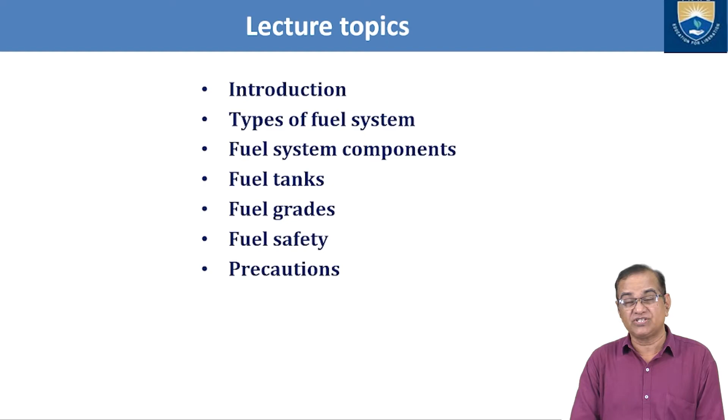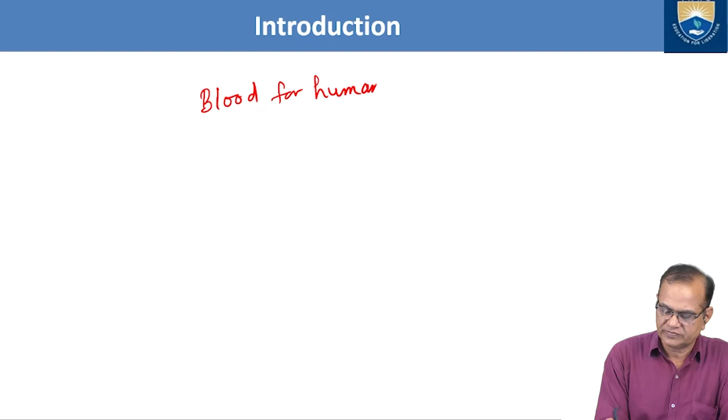So if I talk about the introduction, fuel is like blood. Like blood for human, fuel is for engine. The power is given by the fuel only. If fuel is burned, then only you are going to get the power.

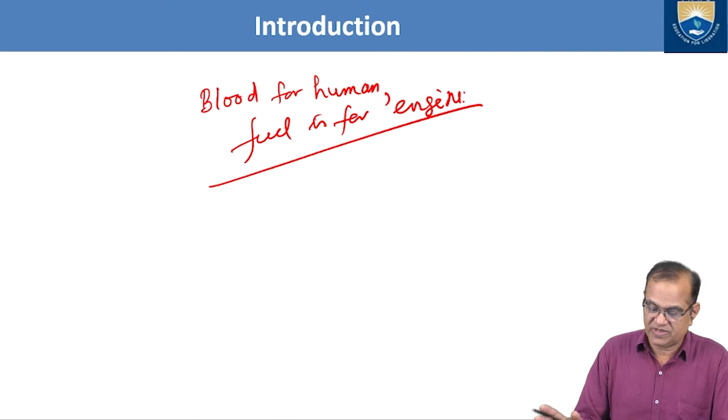These few topics I have already covered in the previous class about different fuel systems, their design criteria, their different types of pumps, their advantages and disadvantages, and so on. Now I will go with the introduction of the fuel system.

The fuel system is one of the most important systems in an aircraft, and its purpose is to store, manage and supply fuel to the aircraft engine. The aircraft fuel system supplies a proper amount of clean fuel at all operating conditions to the engine. The fuel system must be designed such that it supplies a proper amount of fuel to the engine at various phases of flight, such as changes in altitude, rapid maneuvering, sudden acceleration or deceleration.

The fuel system means a complete package of equipment which helps from storage of fuel up to the delivery to the tank in a proper way. That is fuel tank, fuel pipelines, valves, fuel indicators, fuel pressure pumps, warnings, signals, etc.

A fuel system should always be free from the tendency of vapor lock. Vapor lock means the air should not be trapped inside, or the vapor which is generated above the tank should not be locked. That is the tendency.

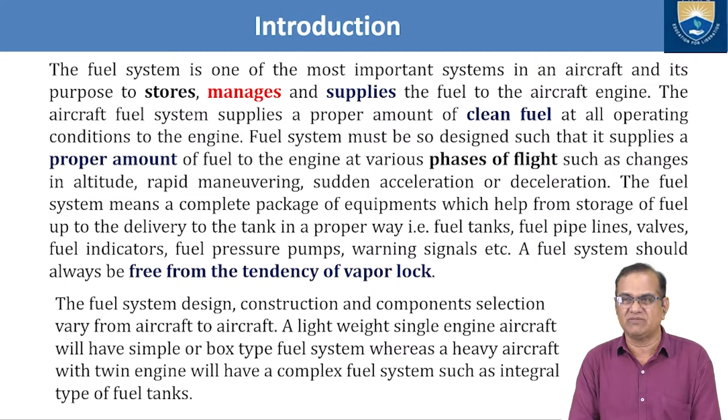The fuel system design, construction and component selection vary from aircraft to aircraft. A lightweight single engine aircraft will have a simple or box type fuel system, whereas a heavy aircraft with twin engines will have a complex fuel system such as integral type fuel tanks.

So here I will talk about the types of fuel systems. Generally, fuel systems are classified into two broad categories on the basis of method to supply fuel to the engine. In a small and light aircraft, generally a gravity feed fuel system is used, while a large turbine engine aircraft uses pressure feed fuel systems.

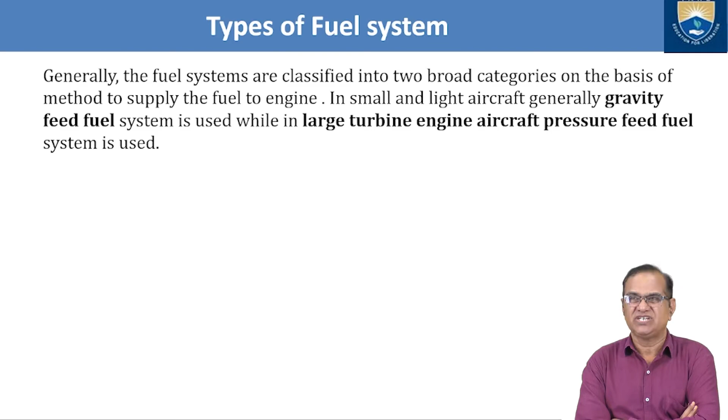So basically we have two types of fuel system: one is the gravity feed fuel system, another is the pressure feed fuel system. For large turbine engines, we use pressure feed, and for small piston engines, we use gravity feed fuel systems.

First, I will talk about the gravity fuel system. This system makes use of the force of gravity to deliver fuel to the power plant from storage tanks. It is most commonly used in high-wing light aircraft, in which the engine is located below the main wing.

As a result, the fuel tank is above the engine, as the fuel tanks are generally located on the main wing. This is the simplest and cheapest mode of fuel feed system, as no additional complex components are used, and it uses only the gravity force.

The main disadvantage of this system is that it is affected by vapor lock, which stops the fuel. This is the big problem and big challenge with this type of system.

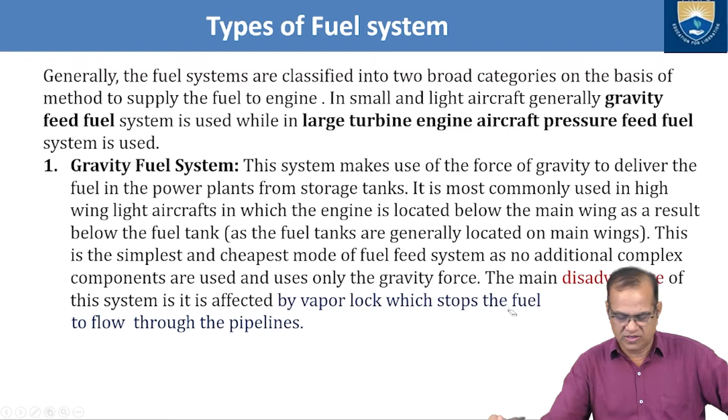Both tanks are connected with a fuel selector valve. As shown in the previous class, the fuel selector valve will select both tanks, select one tank (left or right), or shut off.

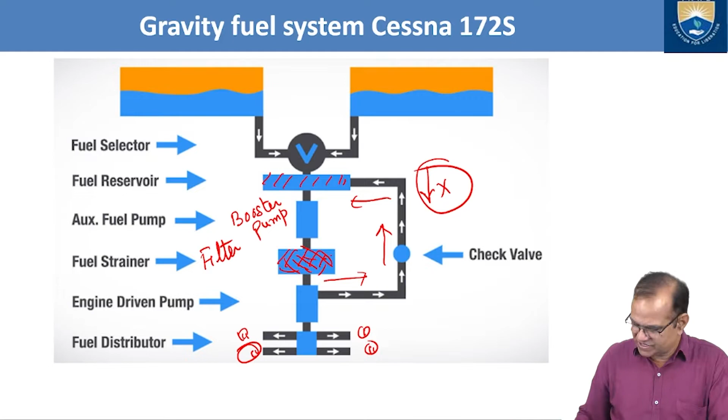Now I will talk about the pressure feed fuel system. In the gravity system, we are not using any pumps, it's just supplied by gravity. But in the pressure feed system, we have to use a pump. Most aircraft are designed such that the engine is mounted above the fuel tank, or in mid-wing or low-wing configurations, the engine is far away from the fuel tank. In such cases, the gravity fuel feed system cannot be used.

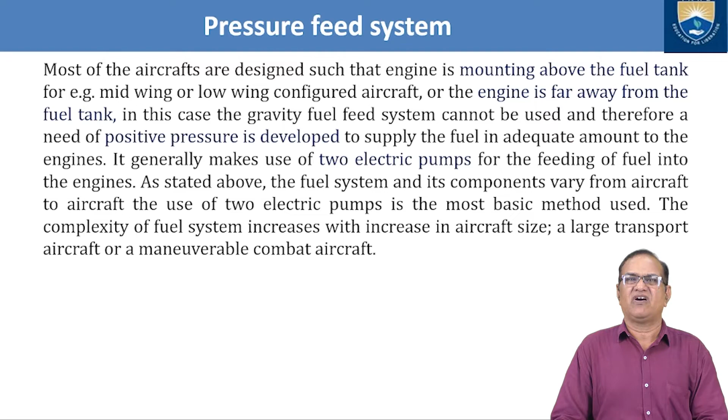So if the engines are mounted above the wing, or far behind or far ahead of the wing or fuel tank, gravity systems may not work and are not very efficient. At that time we have to use pressure pumps, which give pressurized fuel to the engine. A need for positive pressure develops to supply fuel in adequate amount to the engine. It generally makes use of two electric pumps for feeding fuel into the engine. As stated, the fuel system and its components vary from aircraft to aircraft, and the use of two electrical pumps is the most basic method. The complexity of the fuel system increases with the aircraft size, such as a large transport aircraft or a maneuverable combat aircraft.

I am going to discuss the pressure feed system here. In this system, the tank is below the engine. From here there is a feed pump which gives pressurized fuel. From here it goes to the fuel filter, then to the fuel pump. From the fuel pump, the red line goes to high pressure, then to the high pressure pipe, and then to the injection nozzle.

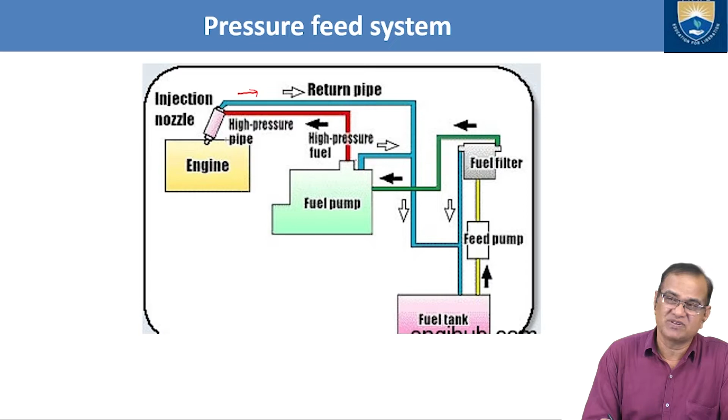If excess fuel is there, it is returned through the return pipe. If excess fuel is in the pump, it also joins this return line, and if excess fuel is in the fuel filter, it also joins. So all the blue color is the return line, the red color is the high pressure line, the yellow color is the low pressure unfiltered line, green is the filtered line, and red is the high pressure line. This is how the pressure feed system works.

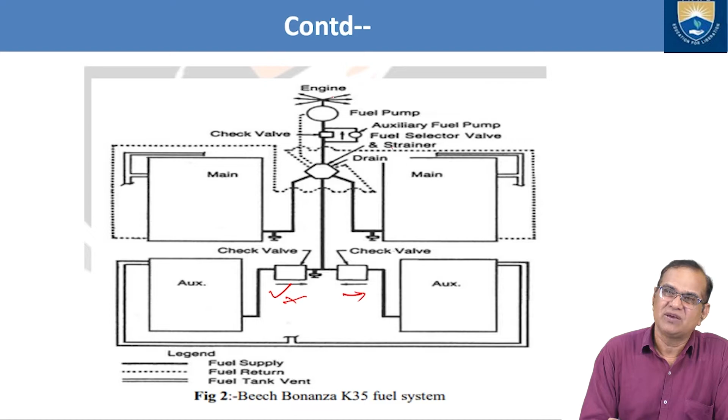Here we have the auxiliary fuel pump, fuel selector valve and the strainer. Then it goes to the fuel pump, and from here it goes to the engine for the different piston engine configuration.

Fuel system component, I want to discuss what is the function of each and every fuel component. So first is the fuel pump. Fuel pumps are used to supply fuel through the system, mainly from engine back to the tank. Basically, we have three types of fuel pumps used.

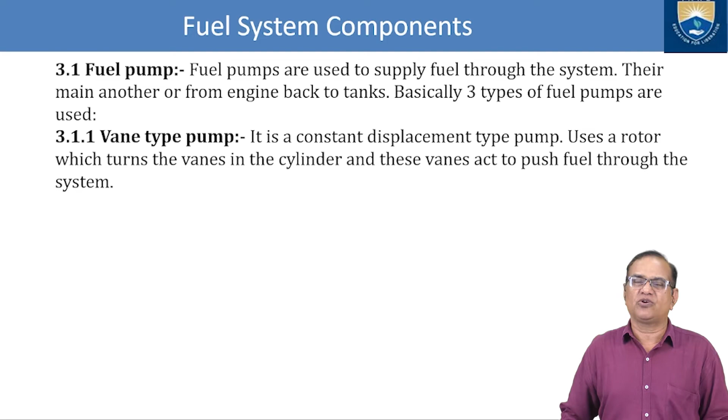Vane type pump, it is a constant displacement type pump, uses a rotor which turns the vane in the cylinder, and these vanes act to push fuel through the system.

Centrifugal boost pump, they are used to supply fuel from one tank to other or from tank to engine. Centrifugal pumps are electrically driven and can operate at different speed as per requirement. Low speed is used to supply fuel while starting, and high speeds are used to supply fuel from one tank to another.

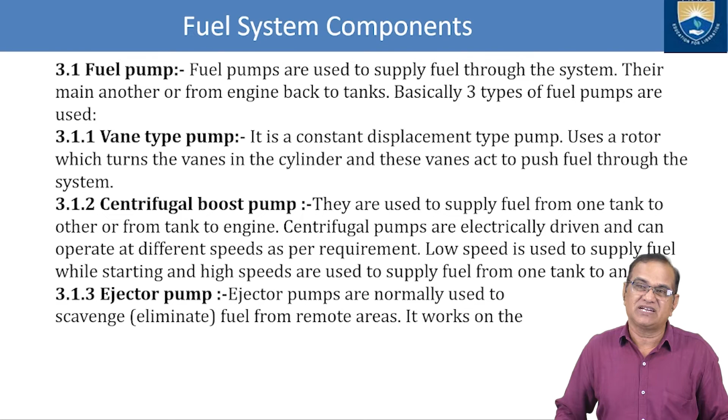Then we have ejector pumps. Ejector pumps are normally used to eliminate fuel from remote areas. I have shown previously, you may remember in my previous class that we used the ejector pump, and these ejector pumps are used to suck the fuel which entered in the previous system.

Now I am showing some fuel pumps here. This you can see here, a booster pump, a small pump. Here we have the balance line, we have the pump outlet, we have the inlet here. Fuel is entering from here, fuel is going from here, and there are some pressure relief valve and other valves fitted.

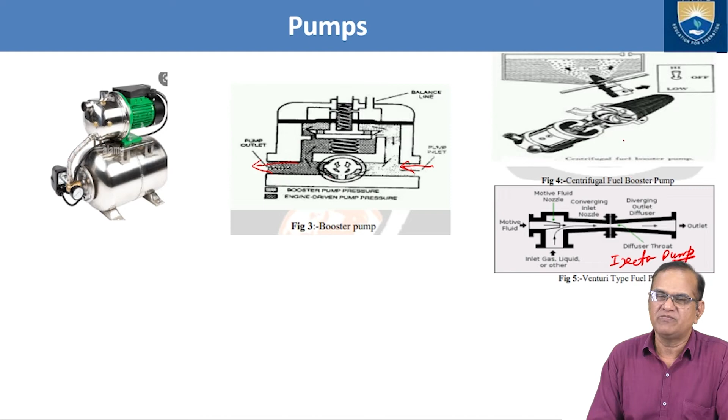Here we have this Venturi type, the ejector valve, ejector pump. This is called the ejector pump. Here we are using the Venturi, and this Venturi is creating the low pressure. Here we have the centrifugal fuel booster pump. So 1, 2, 3, three types of fuel pumps are shown here.

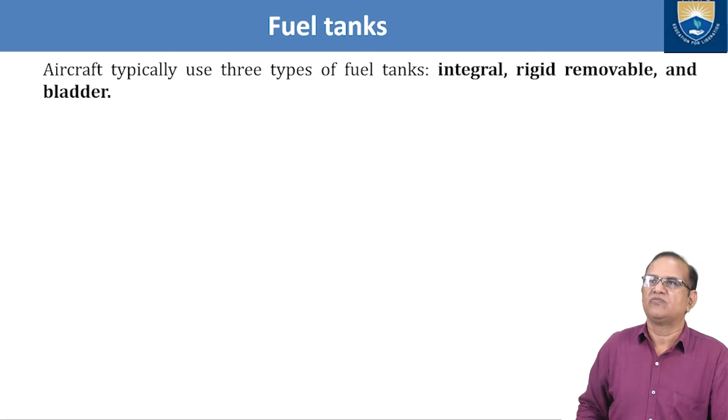Now I will discuss about the fuel tanks. Aircraft typically use three types of fuel tanks: integral, rigid removable, and the bladder. So integral means they are fixed. Integral tanks are areas inside the aircraft structure that have been sealed to allow fuel storage.

An example of this type is the wet wing, commonly used in larger aircraft. Since these tanks are part of the aircraft structure, they cannot be removed for service or inspection. Inspection panels must be provided to allow internal inspection, repair, and overall servicing of the tank. Most large transport aircraft use this system to store fuel in the wing, belly, and sometimes tail of the aircraft.

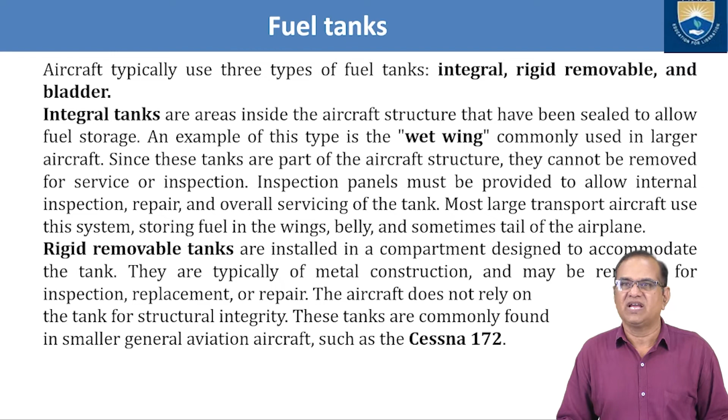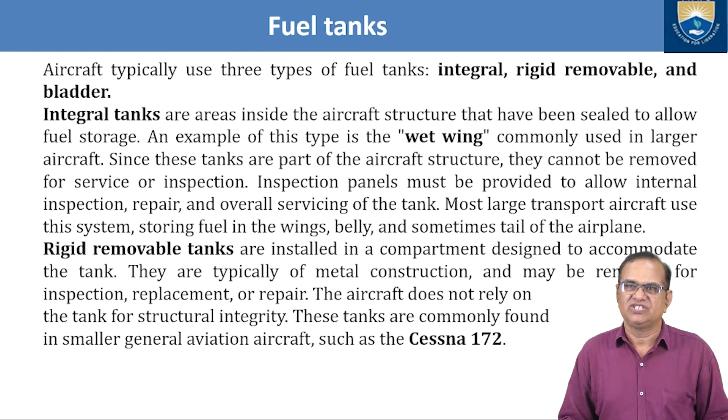Rigid removable tanks are installed in a compartment designed to accommodate the tank. They are typically of metal construction, and they may be removed for inspection, repair, replacement. The aircraft does not rely on the tank for structural integrity. These tanks are commonly found in smaller general aviation aircraft such as the Cessna 172.

The third one is the bladder tanks or fuel cells, reinforced rubberized bags installed in a section of the aircraft structure designed to accommodate the weight of the fuel. The bladder is rolled up and installed into the compartment through the fuel filler neck or access panel, and is secured by means of metal buttons or snaps inside the compartment.

Many high-performance light aircraft, helicopters, and some smaller turboprops use bladder tanks. One major downside to this type of tank is the tendency for material to work harden through extensive use, making them brittle, causing cracks. One major plus side is the ability to use as much of the aircraft as possible to store fuel. So being a rubberized item, after some time it is likely to crack, and this crack may cause the aircraft to leak.

But the positive side is that wherever you want to use, you can accommodate extra fuel on this. Combat aircraft and helicopters generally use self-sealing fuel tanks.

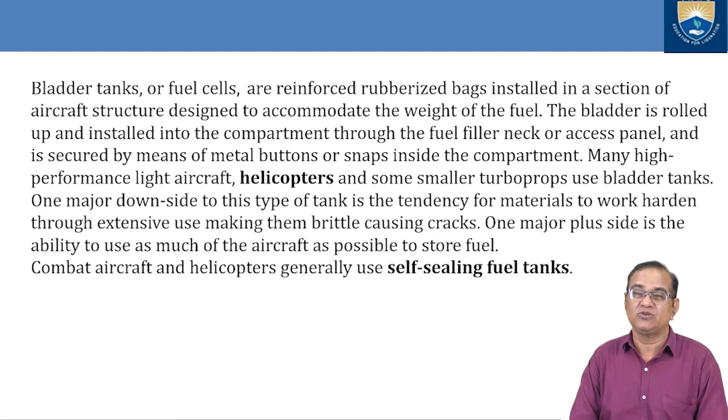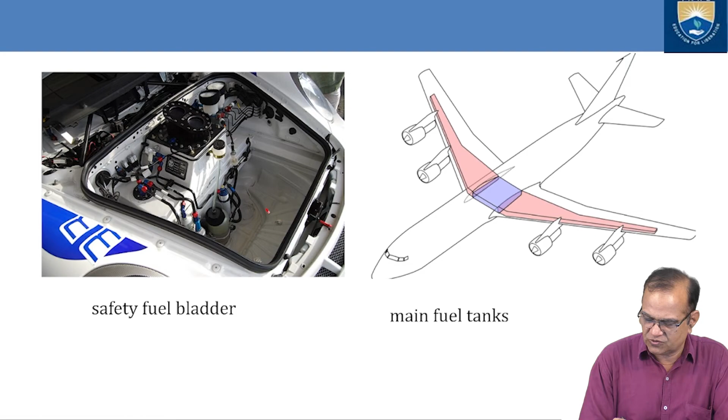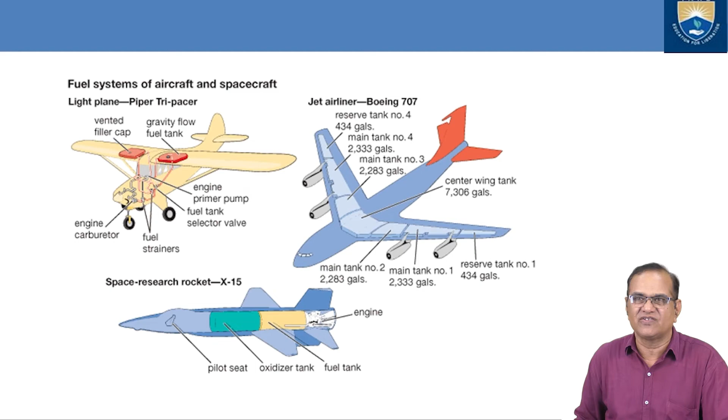We have also seen that we are using some fuel in the aircraft, and different countries use different types of fuel grades. Fuel for aircraft with turbine engine is classified as Jet A, Jet A1, Jet B. Jet fuel is basically kerosene and has a distinctive kerosene smell.

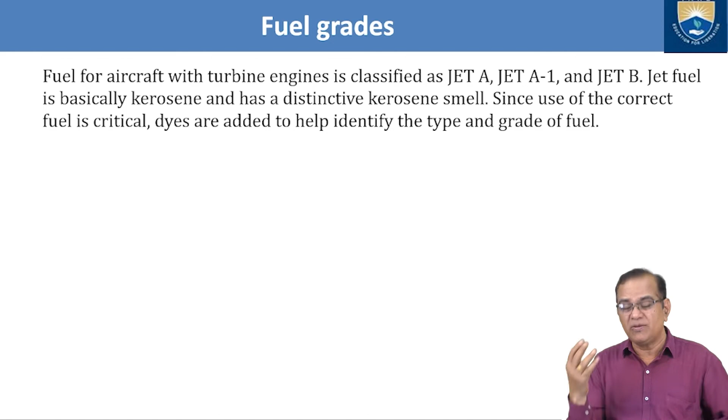Since use of the correct fuel is critical, dyes are added to help identify the type and grade of the fuel. These three types of fuel are all kerosene, but they have some special properties, so we should be able to identify which fuel is used here.

So these aircraft use Avgas 80, Avgas 100, and 100 LL. Although Avgas 100 LL performs the same as grade 100, the LL indicates it has a low lead content, called the low lead content. Here you can see Avgas 80, this is A1, and this is B.

Avgas 80 is red in color, Avgas 100 is green in color, Avgas 100 LL is blue in color, Jet A is colorless or straw. These colors are pasted on the pipelines so that the maintenance person or the person working can identify which type of fuel is used.

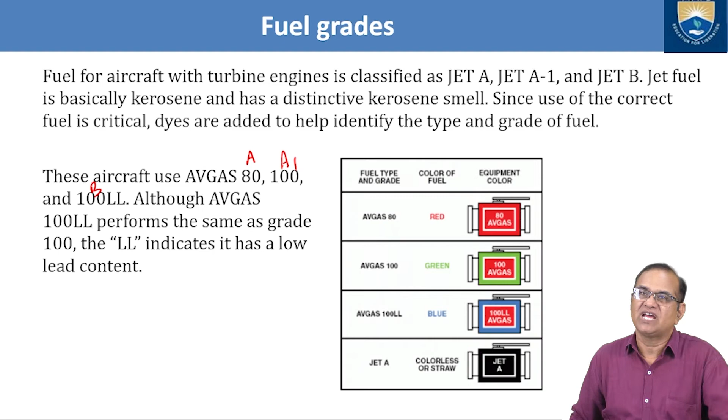Now I will talk about fuel safety. It is very much important because fuel is very flammable. So proper design and construction of a fuel tank plays a major role in the safety of the system of which the tank is a part.

In most cases, intact fuel tanks are very safe, as the tank is full of fuel vapor air mixture that is well above the flammability limits and thus cannot burn even if an ignition source were present.

Bunded oil tanks are used for safety, storing domestic heating oil and other hazardous material. Bunding is often required by insurance companies rather than a single-skinned oil storage tank.

Several systems such as battle jacket and rubber bladders have been developed and deployed for use in protecting from explosion caused by enemy fire, for the fuel tanks of military vehicles in conflict zones.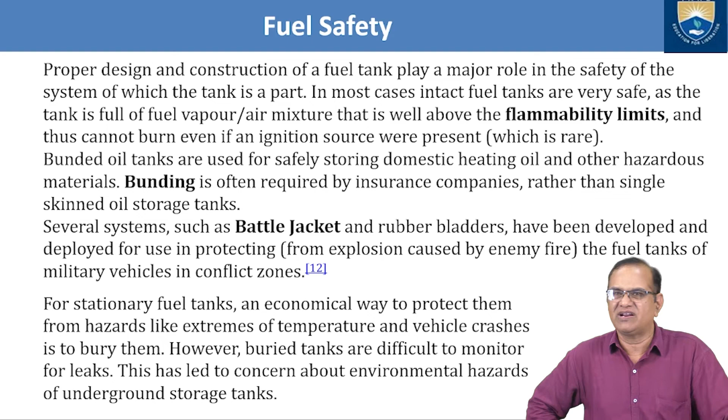For stationary fuel tanks, an economical way to protect them from hazards like extremes of temperature and vehicle crashes is to bury them. However, buried tanks are difficult to monitor for leaks. This has led to concern about environmental hazards of underground storage tanks.

Precautions before refueling means whenever we are filling the fuel, what type of precautions an individual has to take.

Personnel engaged in refueling shall not carry lighters or other means of ignition items, and shall not wear footwear with exposed iron or steel studs. The GPU must be positioned at least 6 meters away from the aircraft fuel coupling and venting points, hydrant valve, and other refueling equipment.

Precautions prior to aircraft refueling: aircraft operators shall appoint a refueling in-charge to supervise the refueling procedure and handle the refueling process, including irregular situations. The refueling in-charge shall identify himself to the into-plane refueling operator.

Fire extinguishers and aviation fuel system emergency shutdown valves should be available at readily accessible positions at the aircraft parking stand and on all refueling vehicles. Regular emergency response training should be conducted to ensure the refueling crew is conversant with contingency procedures in airport fire contingency and the apron control center for spillages or fire.

I want to explain that the first and foremost precaution is this: we should not carry any lighter, matchstick, or any other ignition item. Also, the shoes should not have nails. If nails are there, the friction between the nail and the body can generate a spark, and if this spark occurs near the fuel tank, there are chances of fire.

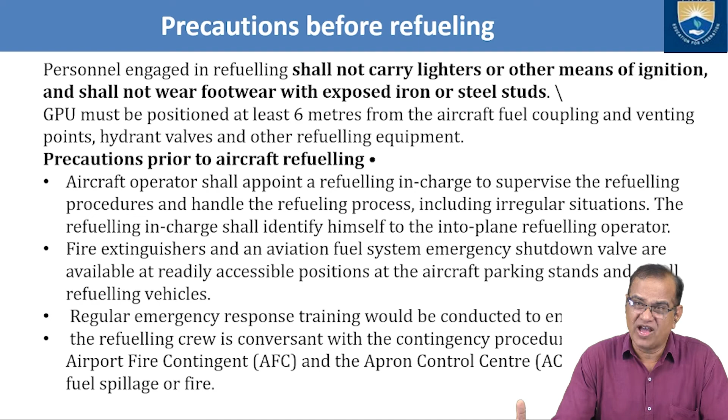During refueling, a supervisor or person in charge must be nominated, and he or she should be properly qualified. They should ensure people are positioned with firefighting equipment and extinguishers, and that the airport fire contingent and apron control centre are informed during fueling operations.

The fueling in charge shall ensure the aircraft wheels are adequately chocked before refueling starts. A refueling zone extends not less than 6 meters radially from the filling and venting point of the aircraft, from the hydrant valve in use, and from the tank vent of the bowser. Refueling does not take place if hot brakes occur after landing, until the brakes have cooled to reduce potential fire danger.

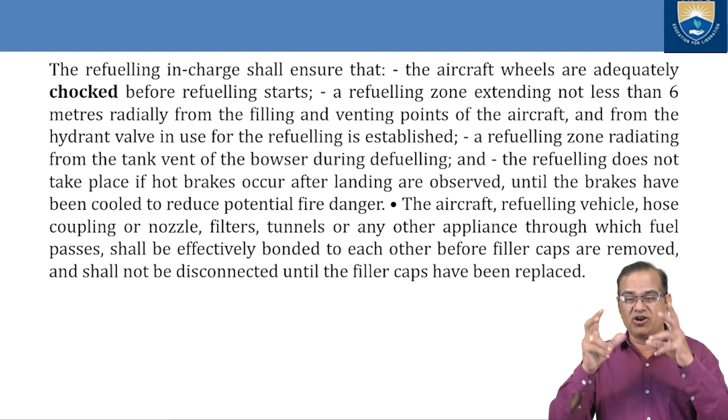The aircraft refueling vehicle hose, coupling, nozzle filter, tunnel, or any other appliances through which fuel passes shall be effectively bonded to each other. Filler caps, once removed, shall not be disconnected until they have been replaced. There should be electrical earthing and bonding, with all caps properly earthed. Make sure there is no venting point or other fuel point within 6 meters of where you are refueling the aircraft.

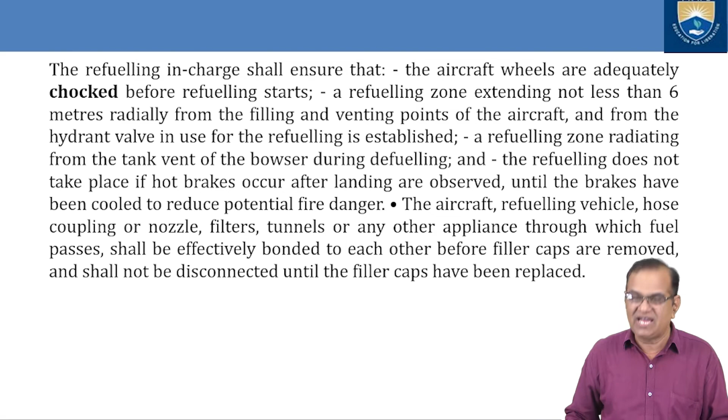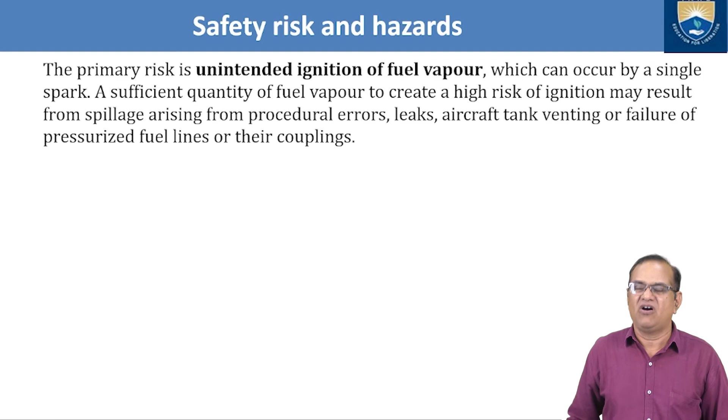Safety risks and hazards: the primary risk is unintended ignition of fuel vapor, which can occur from a single spark. A sufficient quantity of fuel vapor to create a high risk of ignition may result from spillage arising from procedural error, leaks, aircraft tank venting, or failure of fuel lines or their couplings.

Now, what are the threats? Fuel leak is the main threat. If fuel is leaking, it may cause a fuel fire, and the pressure of your fuel tank or pipeline will be disturbed. Fuel imbalance is another threat - the fuel in the left wing and right wing should be balanced. It should not be that one side has more and the other has less, as this will cause imbalance of the aircraft.

Fuel freezing can occur if moisture is present in the fuel. As I mentioned, 14% of air in ATF can be trapped at sea level condition, and as you go up, this trapped air or vapor starts boiling and coming out. Moisture in the fuel, due to cool weather, may freeze and block the filter or the nozzles of the fuel injector. We should try to keep the fuel free of moisture, and if not possible, some heating arrangement should be done using bleed air taken from the engine.

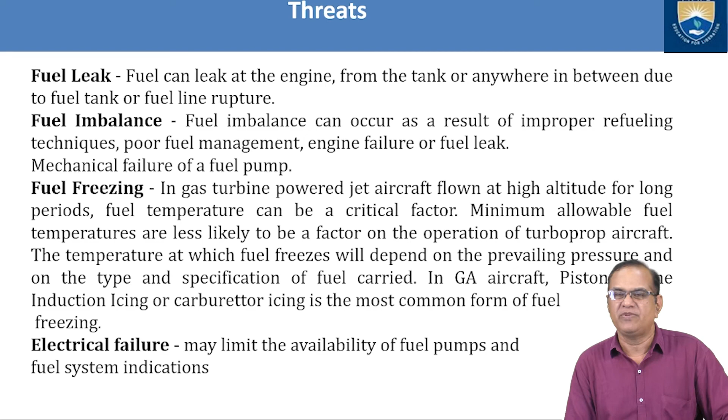Electrical failure may limit the availability of the fuel pump and other systems. So what are the effects?

A fuel leak from an engine can often be resolved by shutting down the affected engine. A tank leak due to rupture in the tank will result in the loss of some or all of the fuel in that tank. If a fuel line is ruptured, it could result in some fuel being unusable. An uncorrected fuel imbalance can lead to difficulty in controlling the aircraft. A pump failure could result in the inability to use the fuel in the affected tank.

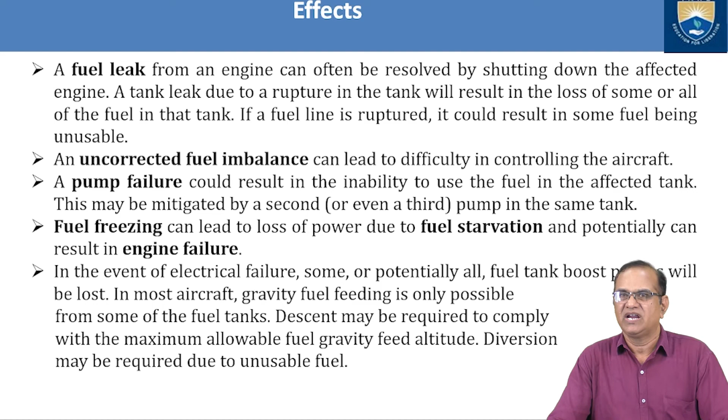This may be mitigated by a second or even a third pump in the same tank. Fuel freezing can lead to loss of power due to fuel starvation, potentially resulting in engine failure. In the event of electrical failure, some or potentially all fuel tank boost pumps will be lost; in most aircraft, only gravity fuel feeding is then possible. From some fuel tanks, a descent may be required to comply with the maximum allowable fuel gravity feed altitude, and diversion may be required due to unusable fuel.

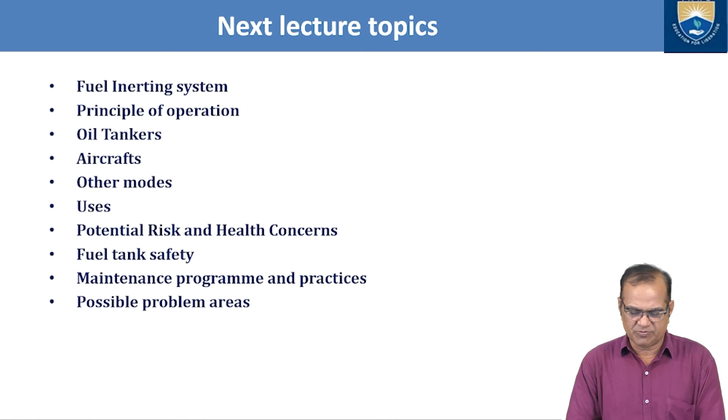Next class, I am going to cover the fuel inerting system, principle of operation, oil tanker aircraft, other modes and uses, potential risk and health concerns, fuel tank safety, maintenance programs and practices, and possible problem areas.